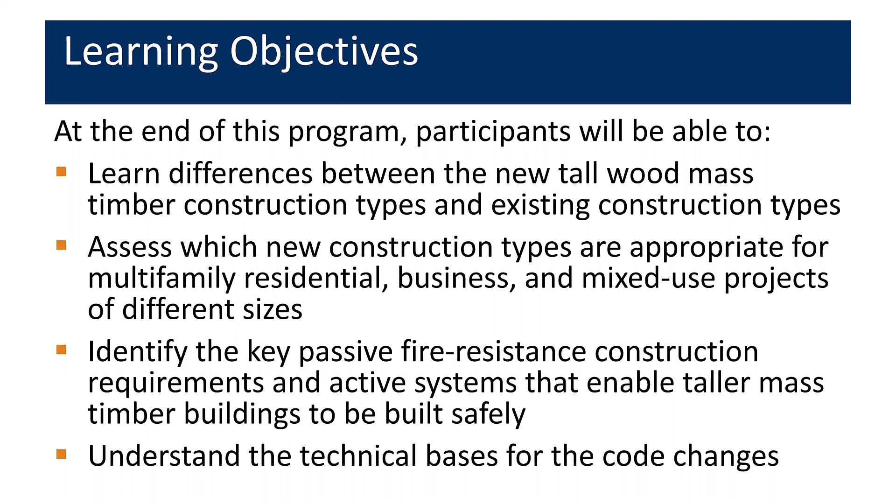Learning objectives: First, at the end of this program, you'll be able to understand the different types of mass timber construction in the 2021 edition of the IBC. You'll be able to assess the different construction types that are appropriate for various uses and heights of buildings. You'll be able to identify the key passive fire resistance requirements and the active systems that are needed to enable the use of taller and larger mass timber buildings. And you'll be able to understand the technical bases for the code changes themselves.

An outline of today's presentation: We'll have an introduction. We'll talk about some of the major issues affecting tall mass timber buildings. I'll bring you through the activities of the ICC Ad Hoc Committee on Tall Wood Buildings. Tim will talk about the major changes and some of the other changes. We have a case study, and then at the end we'll have a summary, and then of course we'll take your questions and answers.

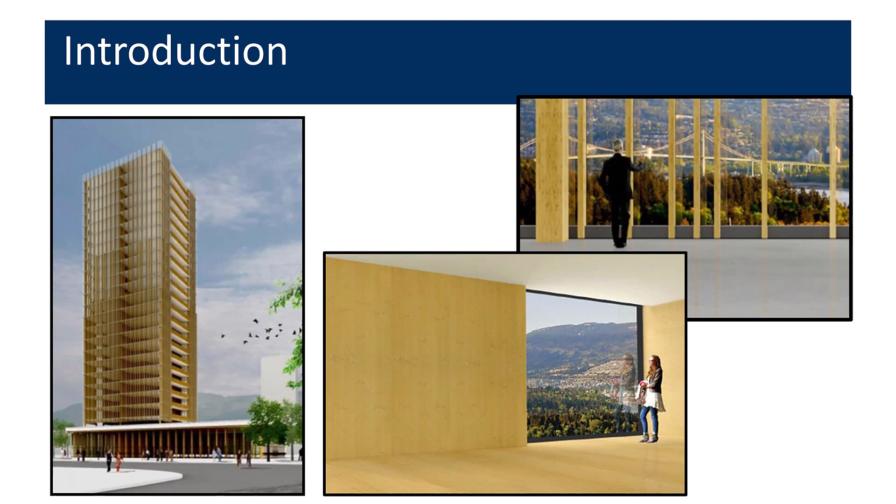So, you've undoubtedly seen much in the news about tall timber buildings recently in technical publications and architectural digests and various publications, and some of them have some very catchy headlines like this. But to folks in the fire safety business, this new technology presents some pretty significant challenges for fire safety.

This is a building that, when it was under construction in Minneapolis, what's now a 7-story, 220,000 square foot building, known in Minneapolis as T3, which stands for Timber, Technology, and Transit. It was considered the first modern tall wood building in the United States. It is, however, within the limitations of the International Building Code at the time it was built. It was not considered very tall at that time.

You'll notice in this photograph that not all of the structural elements are made of wood. You'll see that there's an elevator and stairway core, as well as the parking level and the foundation of the structure made out of concrete type 1 construction. So some people refer to this as a hybrid building, a combination of non-combustible type 1 in this case, and the type 4 mass timber.

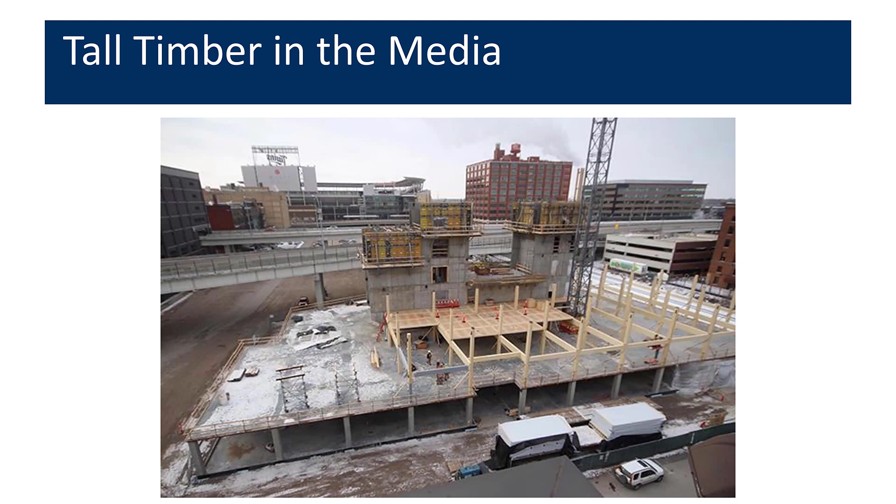This is a rendering of the interior of T3. And according to the information that I have, this building did not require any special local approval. It has an efficient structural system, and it's about 1/5 the weight of a similarly sized concrete building. So that has an effect on the foundations.

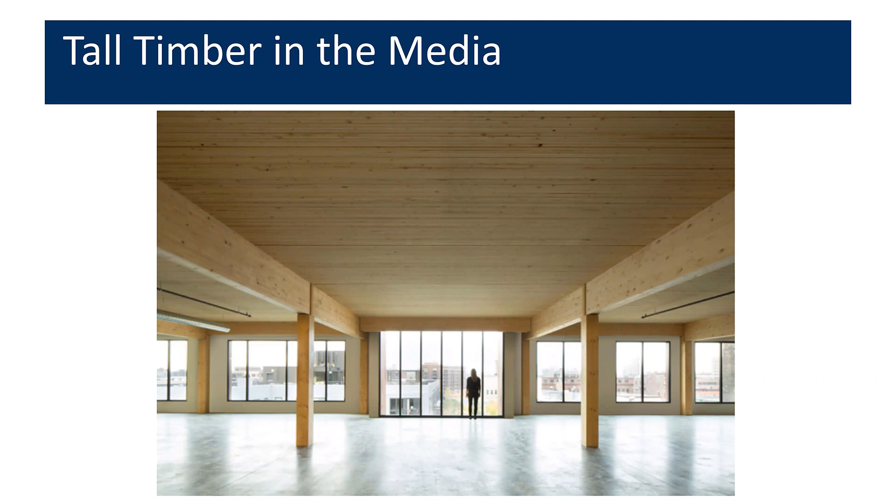So in addition to being made from sustainable lumber, which in this case looks very warm and inviting, it's also less energy intensive to extract these materials. And this building is estimated to sequester about 3,200 tons of carbon.

This next photograph is that of a mass timber building recently completed in Vancouver, at the University of British Columbia. It's one of the tallest mass timber buildings in the world. It's 18 stories and provides housing for more than 400 students, as well as including some amenity spaces. This is a hybrid structural system comprised of CLT floor slabs, that is cross-laminated timber, glue-lam columns, steel connectors, and concrete cores. This building stands about 53 meters tall.

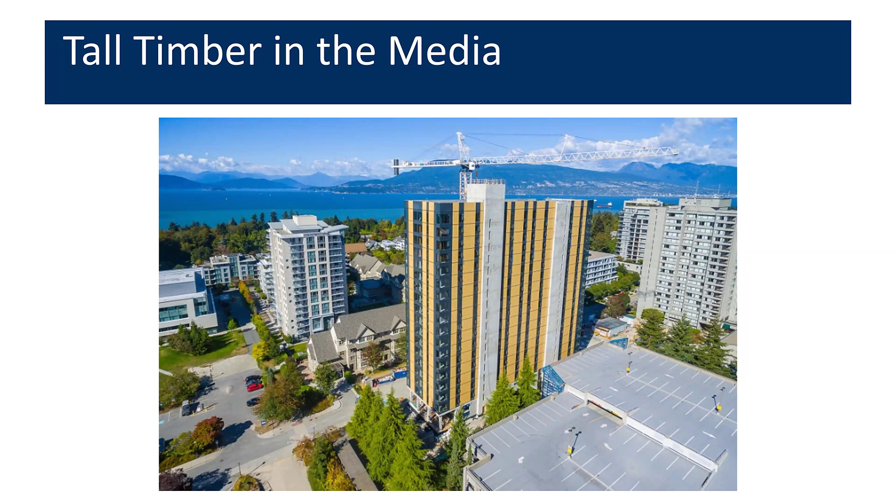I'll come back to that in a minute. In February of 2018, Sumitomo Forestry in Japan revealed plans for what's going to be the world's tallest building, in Tokyo, and that would also be Japan's tallest building. It's called W350 in honor of the firm's 350th anniversary that will occur in 2041. They think quite far in advance. This is a 70-story, 350-meter high building, very tall.

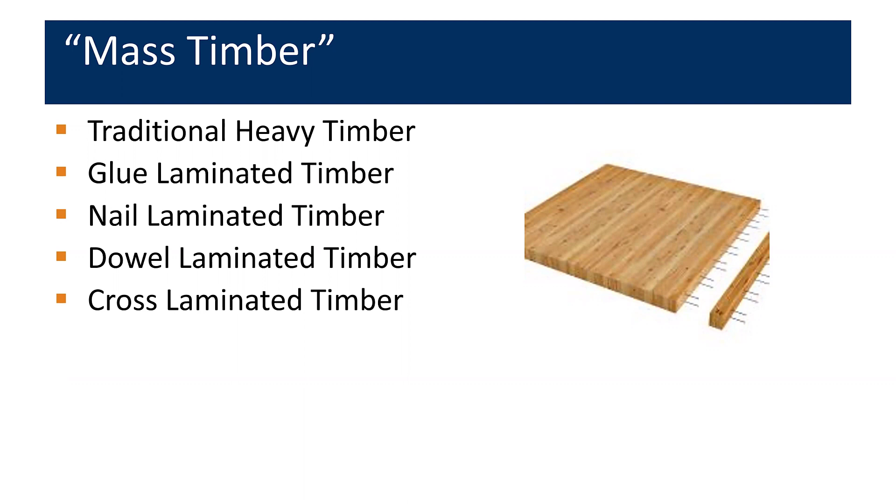So when we talk about mass timber construction today, what do we mean by that? In our ICC committee work, we use the term mass timber in a broad sense and included a new definition for it in the 2021 code. Mass timber includes what we've known as type 4 construction, traditional heavy timber buildings, but also includes glue laminated timber, nail laminated timber, dowel laminated timber, and cross laminated timber, often referred to as CLT.

The traditional heavy timber building is an example shown in this photograph on the left. It's a type of construction where the fire resistance of the structure is obtained by using minimum sizes of wood structural members and minimum thickness of wood floors and roofs, and traditionally does not include concealed spaces under floors and decks. Looking in the model building codes today, heavy timber construction has been given favorable treatment in its allowable area and number of stories, on par with type 2A construction.

This illustration on the right of this slide is one of the illustrations from one of the books I used in school, and it illustrates the components of a heavy timber building very nicely.

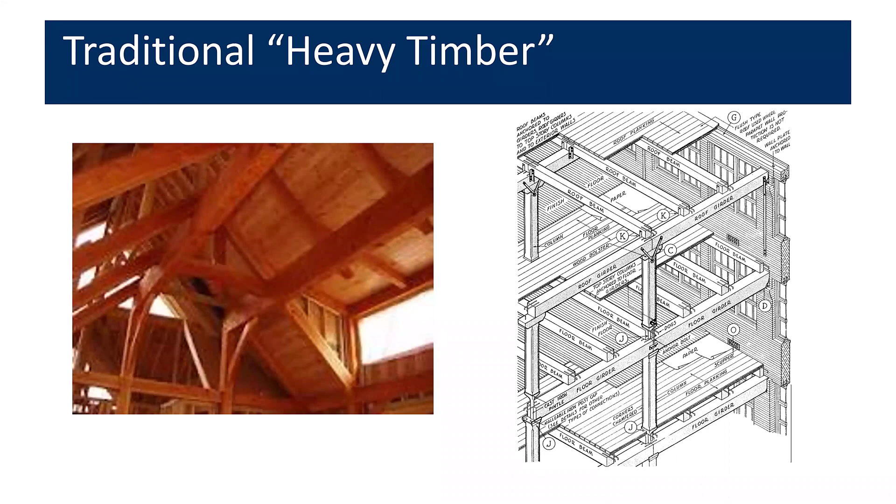Additional types of mass timber include glue laminated timber, a product that's been around for many years. It's composed of individual wood laminations bonded together with durable, moisture-resistant adhesives. The grain of all laminations runs parallel with the length of the member. It can be used horizontally as a beam or vertically as a column, and has very good strength and stiffness properties—pound for pound stronger than steel.

Nail laminated timber is created by fastening together individual lumber components stacked on edge and nailed together, as it sounds. It is used in floors, decks, and roofs, and also for elevator and stairway shaft walls.

Dowel laminated timber, not pictured here, is similar to NLT, but wood dowels are used in lieu of nails so that you have a totally wood product. In both NLT and DLT, sheathing can be added to one side to provide a structural diaphragm, allowing the panels to be used as wall elements.

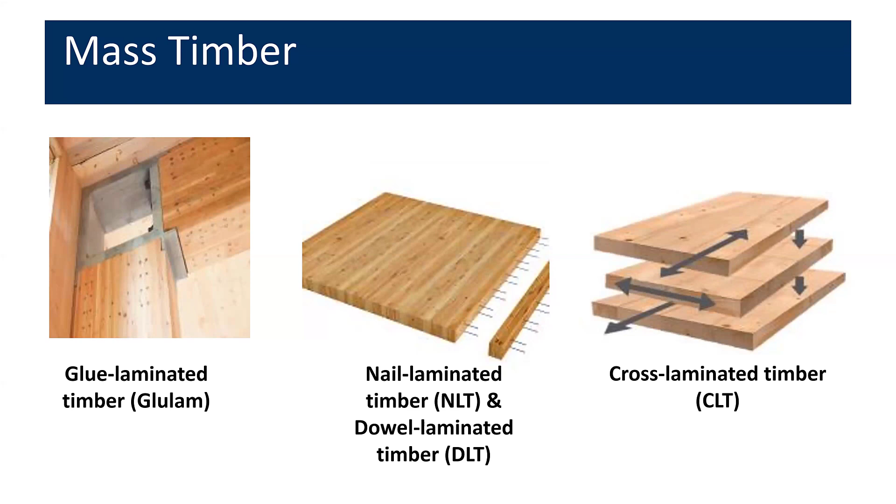CLT, cross-laminated timber, is a panel consisting of 3, 5, or 7 layers of dimensional lumber oriented at right angles to one another, as shown in this illustration, and glued together to form structural panels with exceptional strength, stability, and rigidity. CLT can be manufactured to any customized dimensions. Panel sizes vary by manufacturer, while length is usually limited by the ability to transport via truck or other type of transportation.

So why mass timber? There are a number of things driving the demand for mass timber buildings today. Wood products are made from renewable resources found abundantly in North America. In addition to the environmental benefits of building with wood, there are some cost reductions that help offset the additional cost of materials.

The T3 project in Minneapolis that I mentioned included 180,000 square feet of timber framing and was built in less than 10 weeks. The Brock Common building in Vancouver has no exposed wood for aesthetic reasons, but that construction was selected because of speed—the structural parts of that building were completed in 66 days.

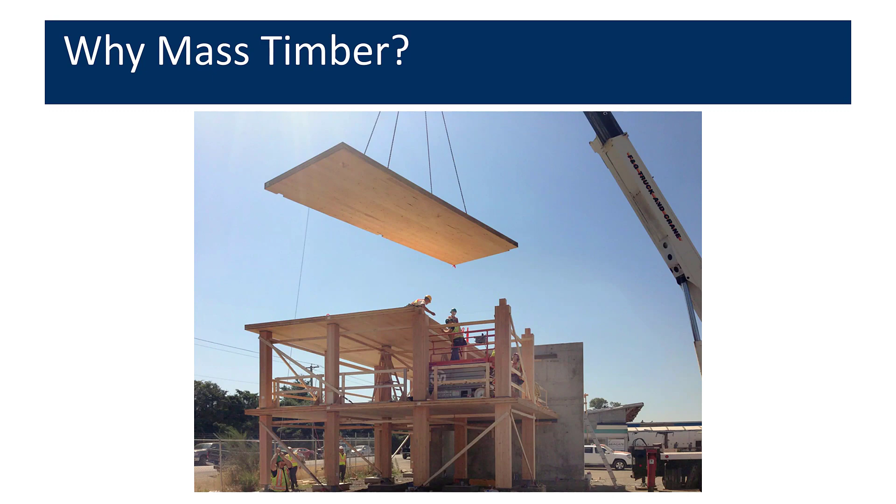Typically, the average time for construction for a mass timber building is about 9 days per floor. Product gets delivered to the site, there's very little storage of construction materials, and it's typically a very clean site.

But what are some of the issues that were of concern to the Ad Hoc Committee on Tall Wood Buildings in the ICC? From a fire safety point of view, the issues are pretty straightforward—there are some traditional principles that are of concern to the committee. Up to now, combustible construction was essentially phased out in high-rise buildings by the building codes. Generally, any type of building with a combustible structural system was limited to 7 stories.

For these reasons, limiting the fuel load reduces the risk to building occupants. As the building gets taller, they need longer evacuation times. Similarly, it facilitates firefighting in a more difficult building geometry as firefighters need to reach the taller buildings.

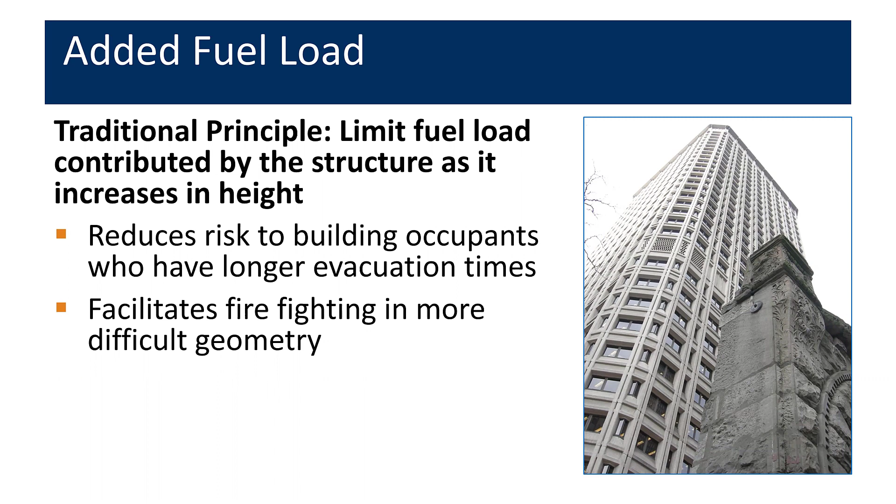So in this case, there's a demand to reduce the probability of structural failure for tall buildings.

And this should be obvious. High-rise building fire safety depends in part on what we call a defend-in-place strategy, where people are allowed and expected perhaps to remain in the building. But that means we have to reduce the risk of collapse to allow people to stay in place, to allow intervention by firefighters, and also to reduce the risk of property damage to the building in question, as well as adjacent buildings, what we call the exposed properties.

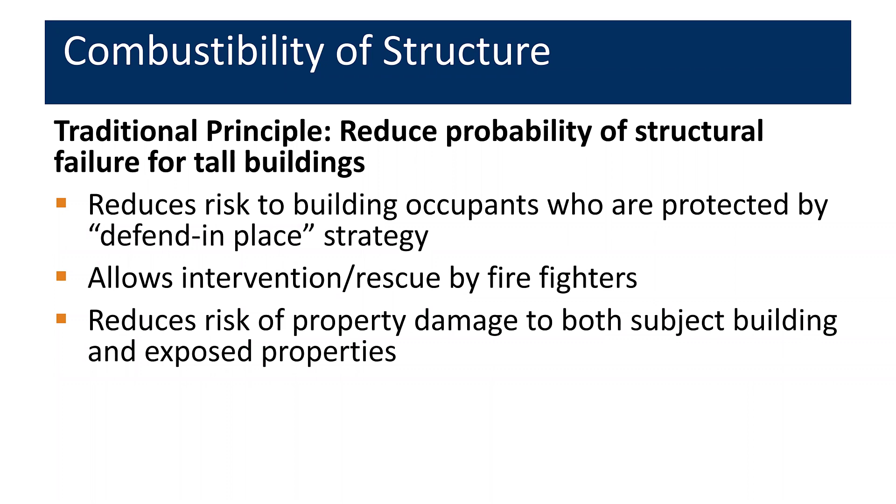We've seen some structural failures in low-rise, non-combustible buildings that are unprotected structures, like single-story warehouses. But they are normally not a defend-in-place concept, and they normally don't injure building occupants or firefighters when that happens. But allowing that type of failure in a tall building is not acceptable.

Another concern I call being well connected. There has been a lot of discussion and concern about the structural elements in a mass timber building. The connections shown here are classic cast iron caps on columns where the columns and beams tie in.

These exposed cast iron elements do not have substantial fire resistance and would not be suitable for use in a multi-hour fire exposure. They have historically not been much of an issue, but they're concerned as the buildings get taller and where we have a defend-in-place strategy, and the building elements are expected to survive a complete burnout of fuel and continue to support the structural loads.

That is normally considered without the benefit of automatic sprinkler protection. So there are systems that protect these connections in these taller mass timber buildings, either by embedding the connection within the wood or through an exterior barrier or coating or covering. And I envision that there will soon be laboratory listings of these connections that will make it easier for the design community as well as the enforcement community to select approved connection methods.

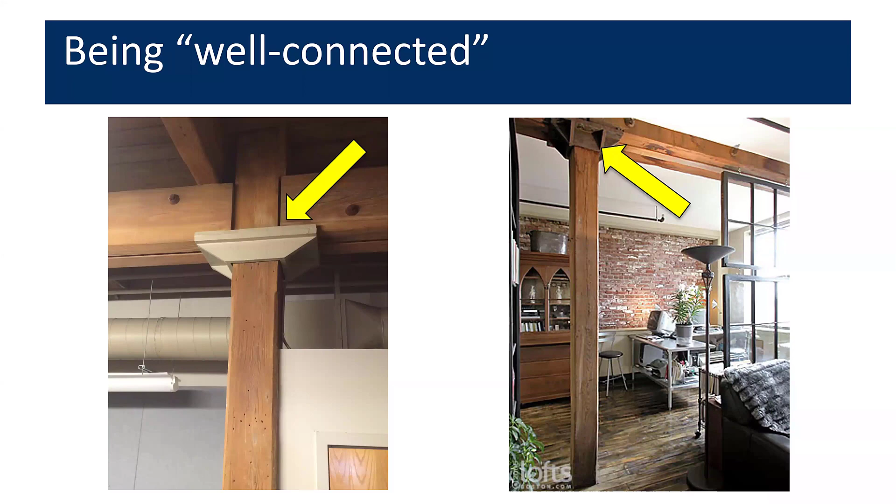Another issue that we've seen as a result of some early testing: the 2015 edition of the IBC recognizes CLT products when they're manufactured according to an industry standard, a product standard called PRG 320. There are various adhesives that are used to manufacture CLT. These adhesives have been used in glulam for many years, like I mentioned earlier. But some of the early fire tests that I'll talk about shortly revealed some concerns about the performance under long fire exposures of these adhesives.

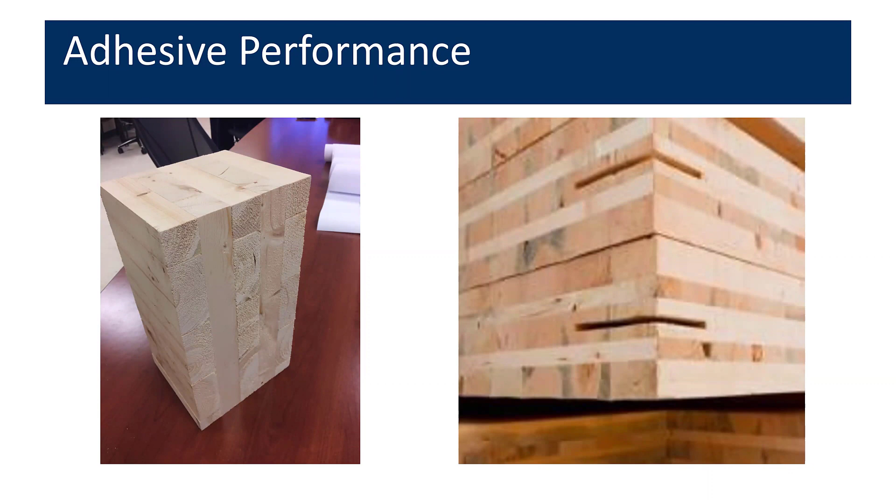So our committee embarked upon a follow-up series of fire tests, and as a result of that, a new version of the product standard PRG 320 was developed, and I'll talk about that a little bit later. So those are some of the major issues that our committee faced before we even got started.

So I want to talk a little bit about the work of the Ad Hoc Committee and how we developed what is now in what will be the 2021 edition of the IBC. In late 2015, the ICC Board of Directors appointed an ad hoc committee to explore the science of tall wood buildings, to review the literature, to look at fire tests, and ultimately develop language for incorporation into the IBC. Our first meeting was held in the spring of 2016.

Our committee consisted of 17 voting members, and of those 17, 2 were engineers. I was one of those engineers. 4 building officials, 3 fire officials, 2 architects, 5 industry representatives, and 1 testing organization, Underwriters Laboratories. There were also several dozen other interested parties who participated in the effort with their comments, their input, and in their overall help with the committee over about a 2.5-year period.

At our first meeting, we established some performance objectives concerning what we expect from tall wood buildings. First, that there would be no collapse under reasonable scenarios of a complete burnout of the fuel without automatic sprinkler protection or manual firefighting being considered. There would be no unusually high radiation exposure from the tall wood building to any adjoining properties that would present a risk of ignition of adjoining properties under reasonably severe fire scenarios. Third, there would be the reverse of that, no unusual response by the tall wood building to a radiation exposure from a fire from an adjoining property that might ignite the tall wood building.

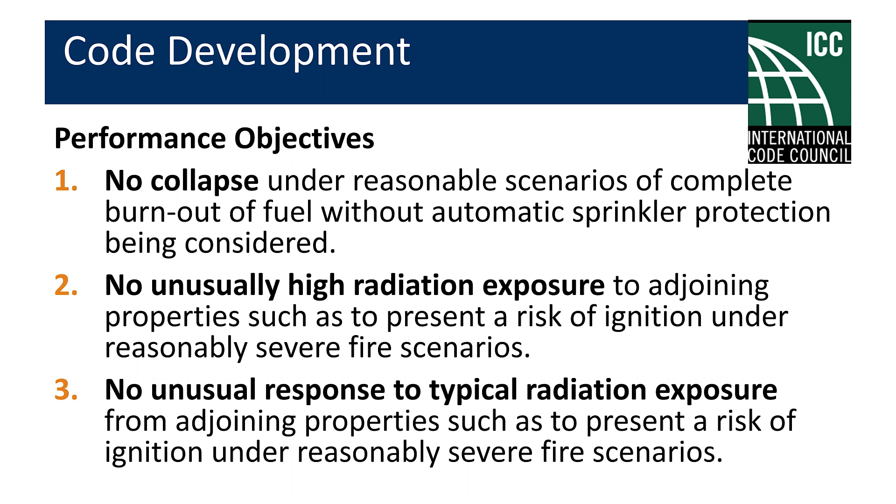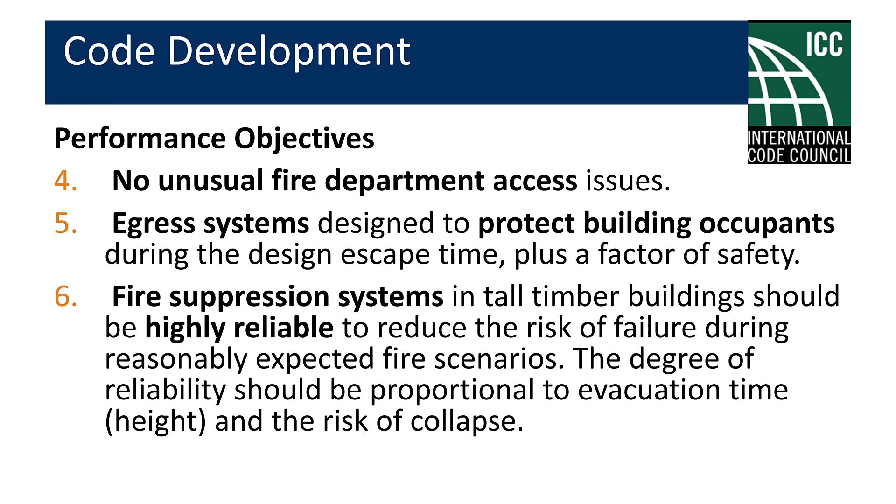Fourth, there would be no unusual fire department access issues. Fifth, that we would have an egress system that would protect building occupants during an escape time, including a factor of safety. We are not using a defend-in-place strategy here. And finally, number 6, that our fire suppression system should be highly reliable to reduce the risk of failure during reasonably expected fire scenarios, and that the degree of that reliability should be proportional to the evacuation time and to prevent the risk of structural collapse.

So we had quite a bit of work to do. Our committee was divided into several subcommittees we referred to as working groups. This is a list of the working groups we had. There were dozens of meetings and conference calls over the period of our work, and involved about 100 people over the course of this 2.5-year period.

All meetings were open to the public. All activities were documented on the ICC website, and that website is still available for review to see what we looked at, as well as some of the working drafts of our work during that 2.5-year period.

One of the things we talked about in our committee was that all of the code change proposals we developed would have their foundation based on actual fire tests. One of our work groups, the Fire Performance and Fire Test Work Group, was responsible to develop the fire test criteria.

Going beyond tests that we received from the NFPA a couple of years earlier that left some questions in our minds, our committee directed a second full-scale fire test program, sponsored in part by the U.S. Department of Agriculture and the American Wood Council, and conducted at the Alcohol, Tobacco, and Firearms Fire Laboratory in Beltsville, Maryland.

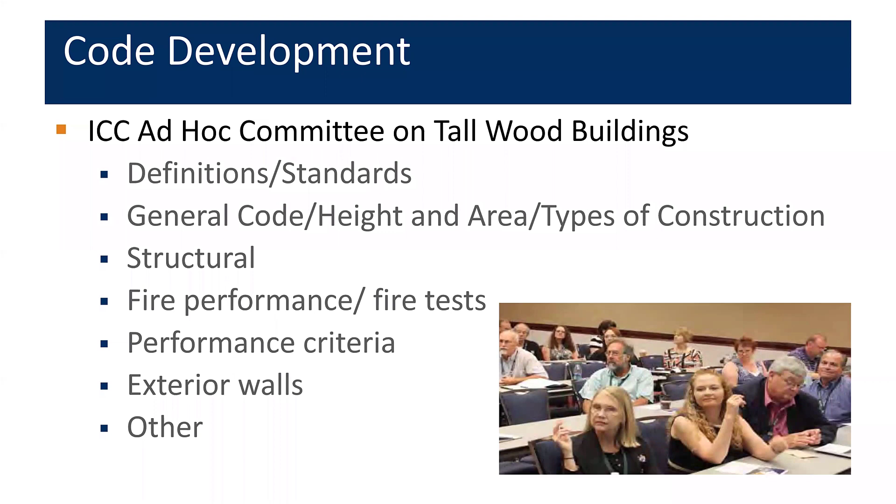Our objective was to submit technically based code changes for the IBC code change cycle, which was coming up in January of 2018. That's the deadline for the 2021 edition.

So as I mentioned, our committee directed that the industry conduct a second series of fire tests with a bit more relevance to the issues of concern. The work group was operating parallel to other work groups, reviewing literature, taking testimony, and reviewing the current edition of the IBC to see what was needed to be modified as we proceeded with our technical analysis.

Back to the fire test. This is a sketch, a floor plan of the simulated residential unit at the Alcohol, Tobacco, and Firearms Lab. It was a two-story space, an apartment simulating a two-room unit with living room, bedroom, bathroom, kitchen, plus a corridor and a stairway. We did that to determine what the environment would be like for responding firefighters.

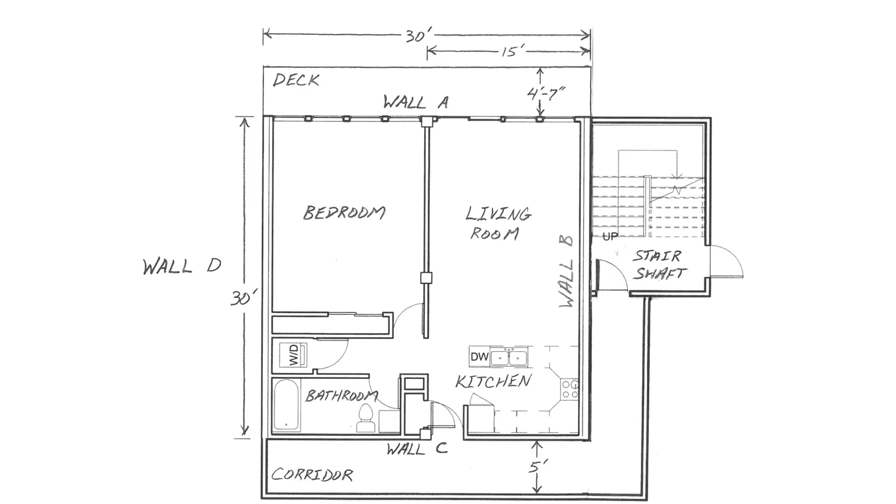This is a summary of the 5 tests we did and some of the major parameters. Test 1 was a baseline test with all walls and ceilings covered with 2 layers of gypsum wallboard. Test 2 was the same, but had 1 wall of exposed wood. Test 3 was the same as test 1, but had 30% of the ceiling area exposed.

Test 4 employed automatic sprinklers operating in a conventional manner with fully exposed walls and ceilings. Test 5 was similar to test 4, but included a delayed operation to simulate what would happen if the sprinkler system was out of service and the fire department, upon arrival, used the fire department connection to provide water to the fire.

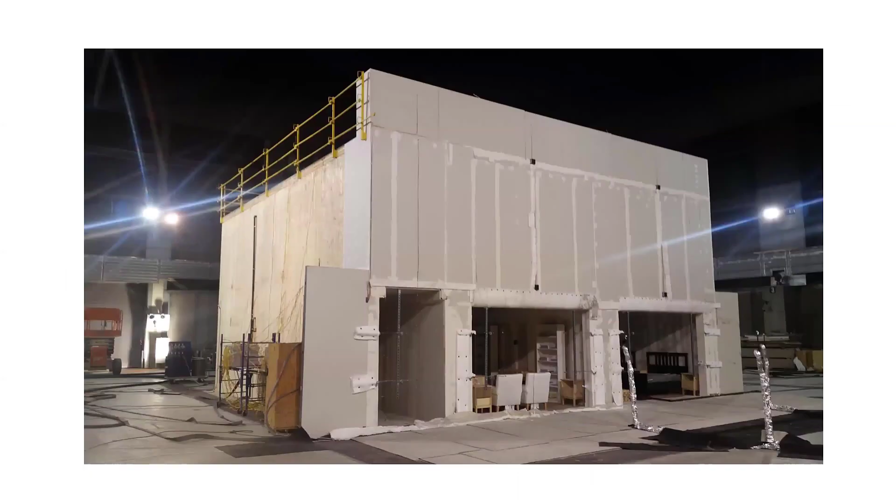This photograph is of the simulated dwelling unit in the Alcohol, Tobacco and Firearms Fire Test Facility. The openings on the second level are blocked off because we did not want to damage the spaces in the second level during the fire test. We ran three of these tests on the first floor.

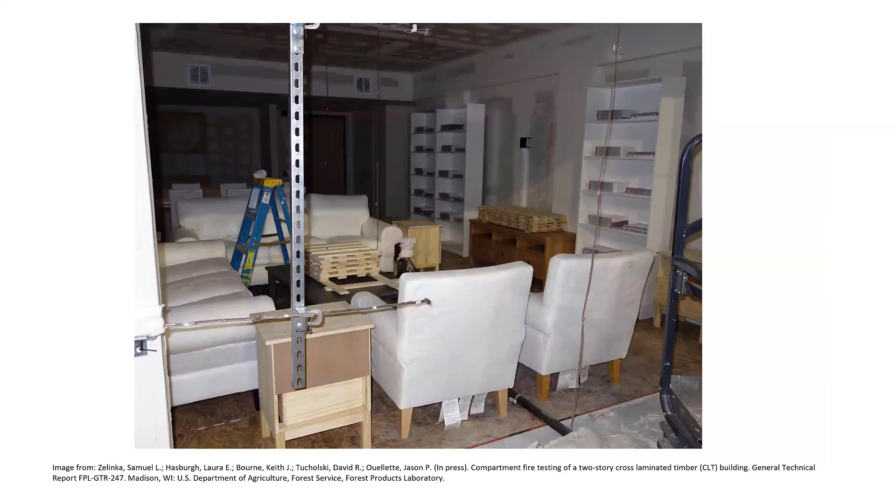This is a photograph of the simulated dwelling unit loaded with typical combustible furniture in each test. This fire load was determined based on a study of typical residential fire loads. You'll see this looks pretty crowded, with wood cribs, as we call them, in the space to get to the fire load that we wanted to achieve as a target.

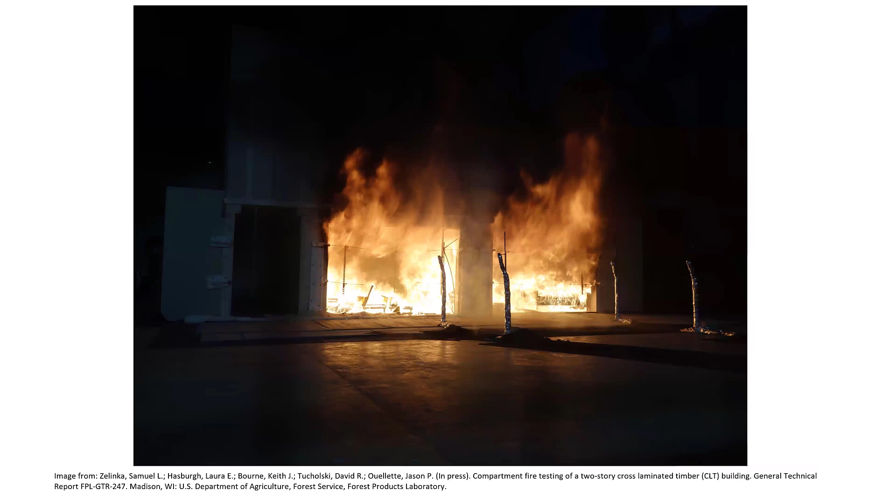This is what one of the fire tests looked like at its peak. Again, the first 3 tests we did had no intervention—no automatic sprinklers, no firefighting. These were allowed to burn themselves out while we collected all kinds of data on temperature, carbon monoxide, heat release rates, and other parameters.

If you're interested, you can see videos of these tests on the ICC website in a high-speed format, so you don't have to spend 2 hours watching each test. I think it provides some very nice insight into what we were achieving and the data obtained. The reports themselves are also available on the ICC website.

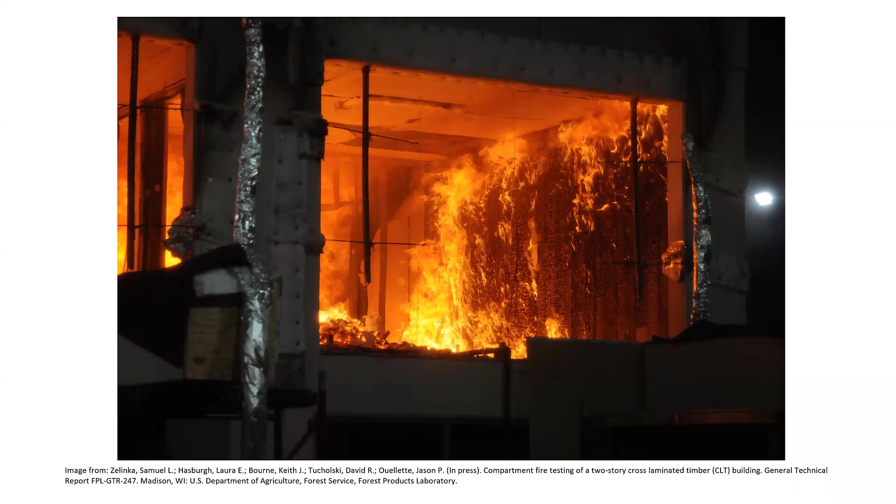Going back to the 5 tests, I want to emphasize this recap of the tests involving automatic sprinklers. Test 4, sprinklers operating in a conventional manner—the results were as expected. There was no remarkable heat exposure or damage to the unit.

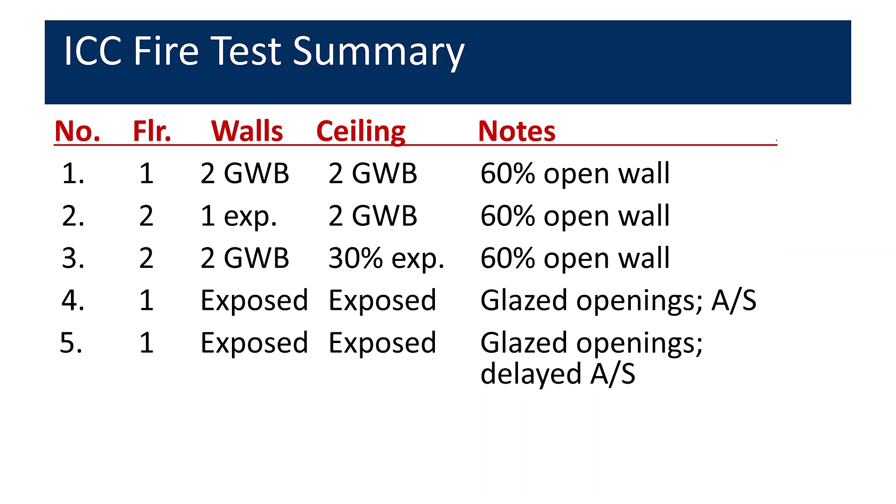In test 5, after a 22.5-minute delay simulating an inoperable sprinkler system, the fire was promptly extinguished as water operated from the open sprinklers. So overall, the sprinklers performed well in both tests.

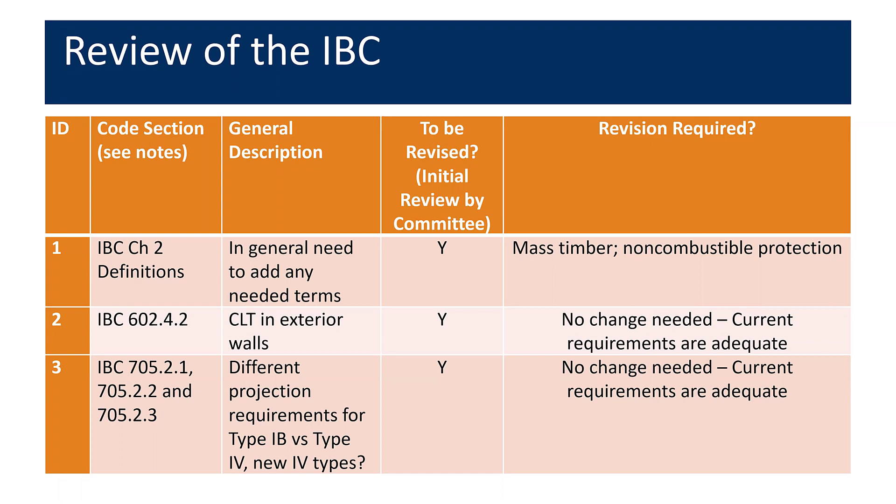So while the fire tests were underway by one of our subcommittees, the technical committee also went through a thorough review of the entire IBC and identified about 100 potential sections of the code that could be affected by the construction of taller mass timber buildings. This is an example of a matrix we used.

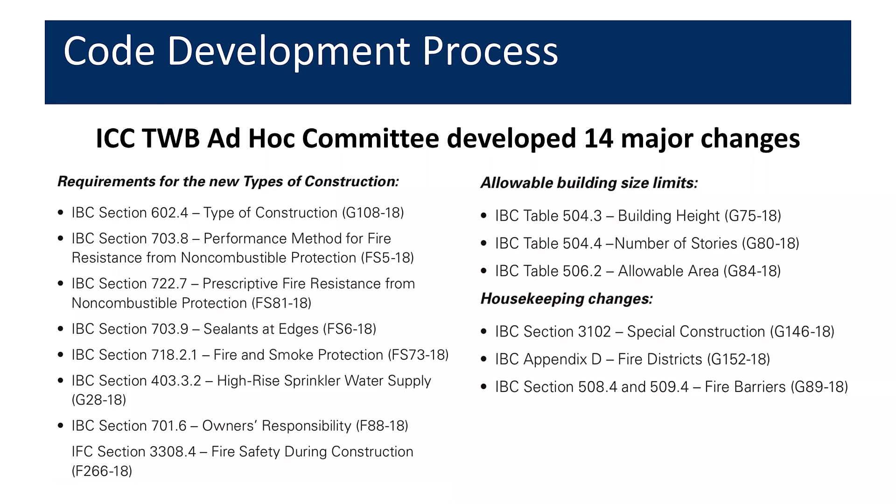We went through those 100 sections of the code, and this work went on for many months. In the end, we developed 14 major code changes to allow taller and larger mass timber buildings than what were currently allowed in the 2018 edition. This is a summary of those major changes. I won't get into all these, but we'll highlight the major changes shortly.

In 2019, the Group B changes, which are related to some of the structural provisions, went through the same process. And in fact, just a week ago at the ICC, the Group B changes were voted on, and we're waiting for the full vote of the membership, which is expected to pass as well. So now we'll get into some of the major changes, and I'll pass it on to my colleague, Tim Costello.

Thank you, Carl. So what's changed in the 2021 IBC? To start, we'll discuss what's in the 2018 International Building Code. The 2018 International Building Code includes 5 main construction types. Type 1 and 2 are non-combustible. Types 3 and 5 have lightweight combustible framing. And type 4 is what is known as traditional heavy timber construction that Carl mentioned previously.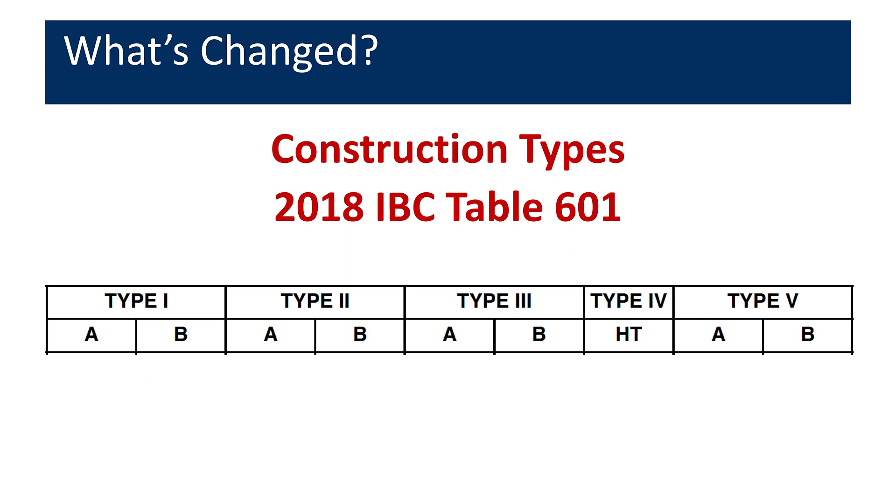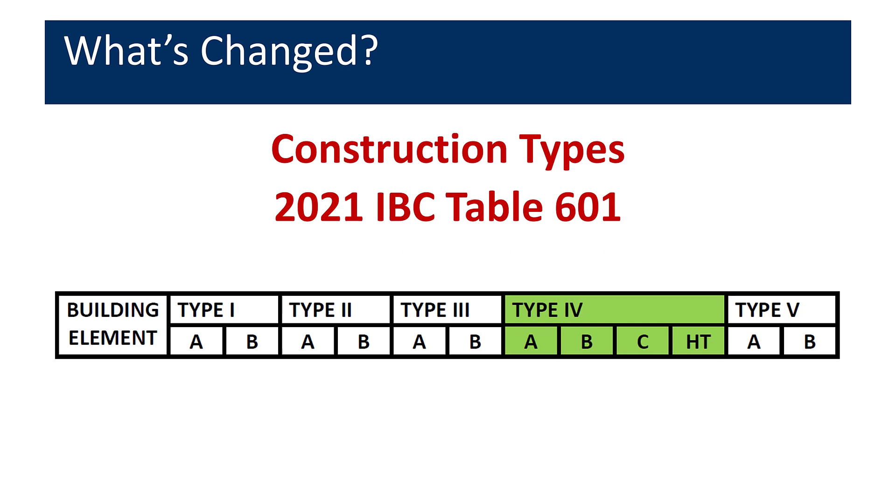The subtypes A and B also provide for different fire resistance ratings for the key building elements within the major construction types. The changes in the 2021 edition introduced 3 new subtypes of type 4 construction: type 4A, 4B, and 4C. What was known in the 2018 edition as type 4 is now called type 4 HT for heavy timber. These new subtypes were the result of market demand, with some designers and owners wanting the wood aesthetic and others wanting to achieve carbon sequestration.

The 3 new subtypes of type 4 construction are significant in that they are based on fire resistance ratings rather than the minimum dimensional lumber sizes previously applicable to type 4 heavy timber construction. A fundamental principle adopted by the Ad Hoc Committee on Tall Wood Buildings was to leave the 2018 IBC requirements for type 4 heavy timber alone. Therefore, the values for type 4 heavy timber in Table 601 remain unchanged. Highlighted in red are the required ratings for the structural frame, walls, and roof.

The minimum ratings for the primary structural frame and bearing walls for type 4A construction are 3 hours, and types 4B and C are 2 hours. Floor construction is 2 hours, and roof construction is either 1 hour or 1.5 hours.

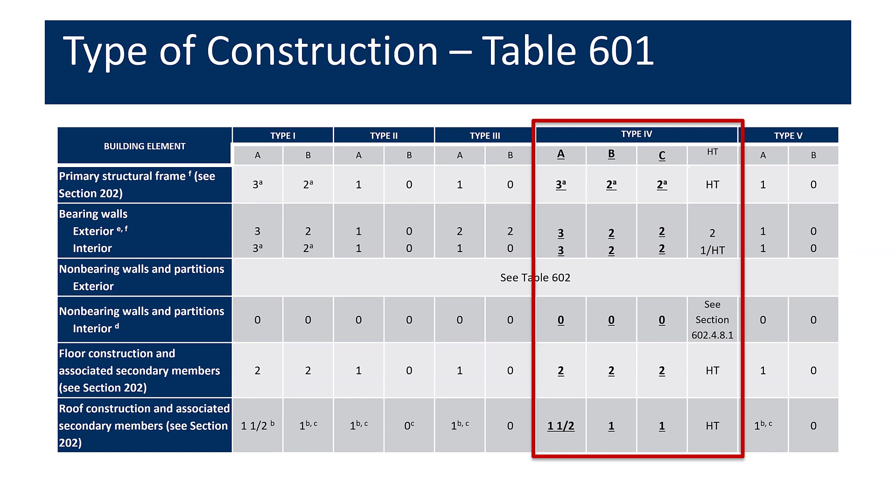The primary difference between each new subtype relates to the amount of exposed wood surfaces that will be permitted. Exposed mass timber surfaces will not be permitted in Type 4A construction, while Type 4B will allow for a portion of the mass timber surfaces to be exposed. Type 4C will allow fully exposed wood surfaces similar to Type 4 heavy timber construction today. Accordingly, Type 4A buildings will be allowed to be taller and larger than Type 4B, and Type 4B larger and taller than Type 4C.

The fire resistance rating of mass timber structural elements is required to be determined based on the fire resistance of the mass timber element itself, which can be calculated, plus the rating from non-combustible protection that is applied to it. Chapter 16 of the American Wood Council's National Design Specification includes information on how to calculate the fire resistance of CLT, NLT, glulam, and solid sawn lumber, and is a great resource for these designs.

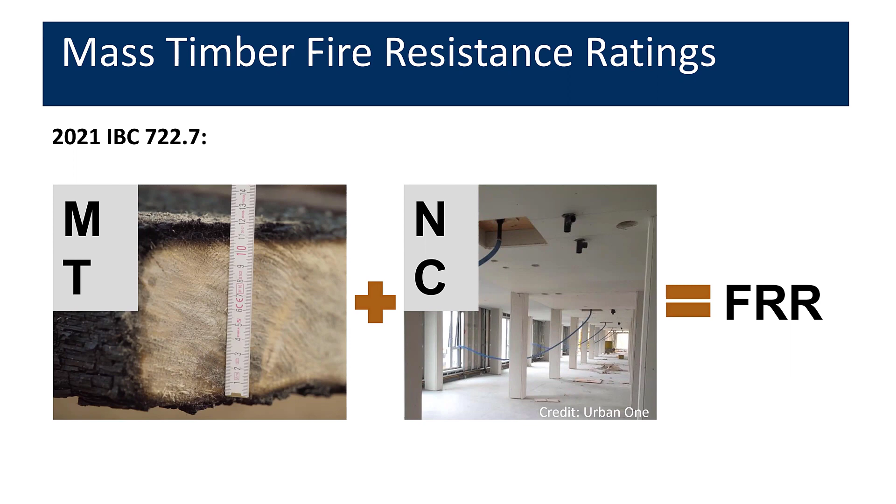In addition to meeting the required fire resistance ratings identified in Table 601, all mass timber elements must also meet certain minimum sizes. These sizes are those historically used for heavy timber in prior editions of the IBC, and they can be found in Section 2304.11.

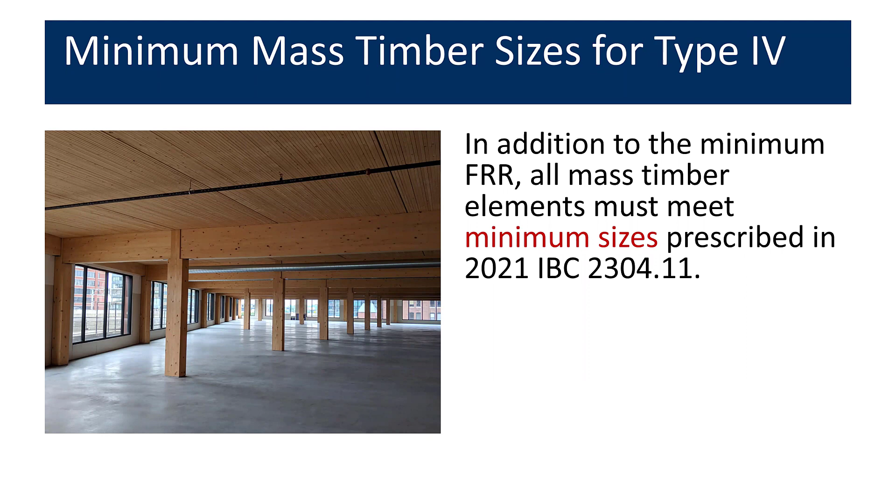Being conservative, for mass timber elements, two-thirds of the required fire resistance rating must be provided by passive protection, offered by non-combustible coverings such as gypsum board. For example, where a 3-hour rating is required for Type 4A construction, at least 120 minutes of that rating must come from passive protection.

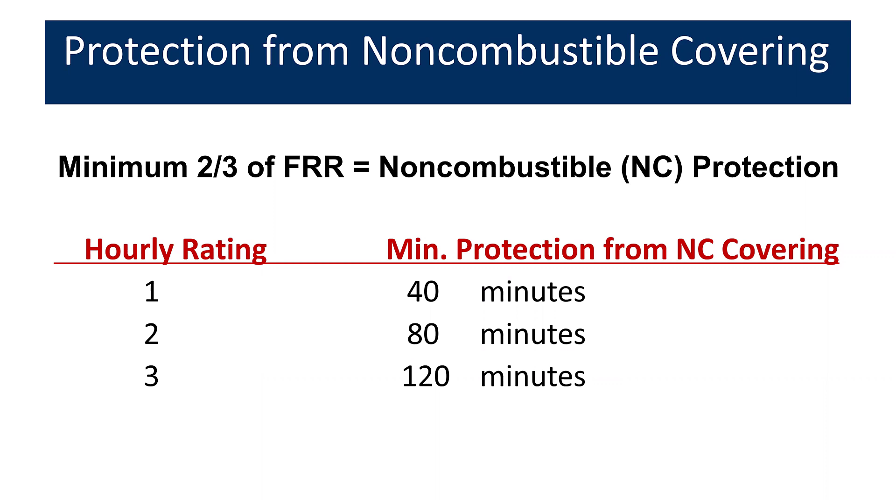To aid in determining the amount of protection afforded by typical non-combustible materials, Section 722.7 was added and includes a prescriptive table similar to this one identifying the amount of protection provided. This section also details the method of attachment, finishing, and edge treatment where bordering on exposed mass timber areas. As an example, 1 layer of Type X gypsum wallboard will afford either 30 or 40 minutes of protection depending on its thickness. 2 layers would provide 80 minutes.

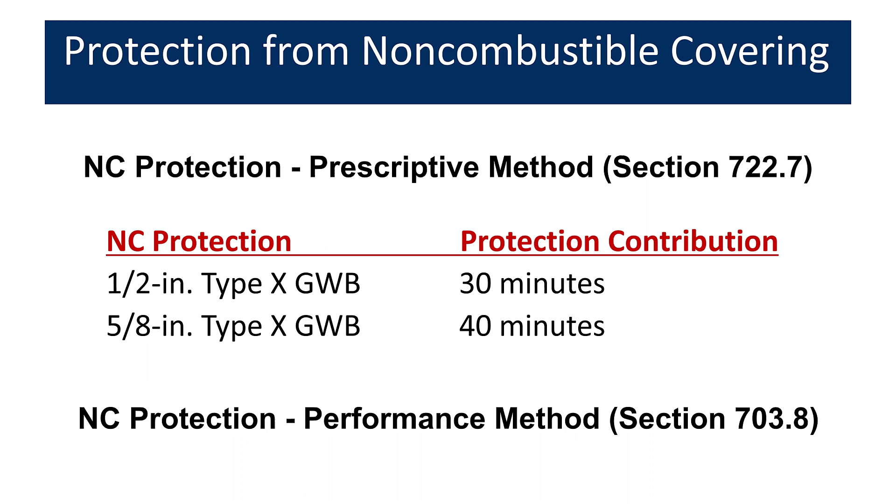In addition to the prescriptive fire resistance method described in Section 722.7, Section 703.8 was added to provide for a performance-based approach. This will allow designers to provide non-combustible protection using other materials or assemblies based on the ASTM E119 fire test procedure to determine the time contribution of the non-combustible protection to the fire resistance rating of the overall mass timber element.

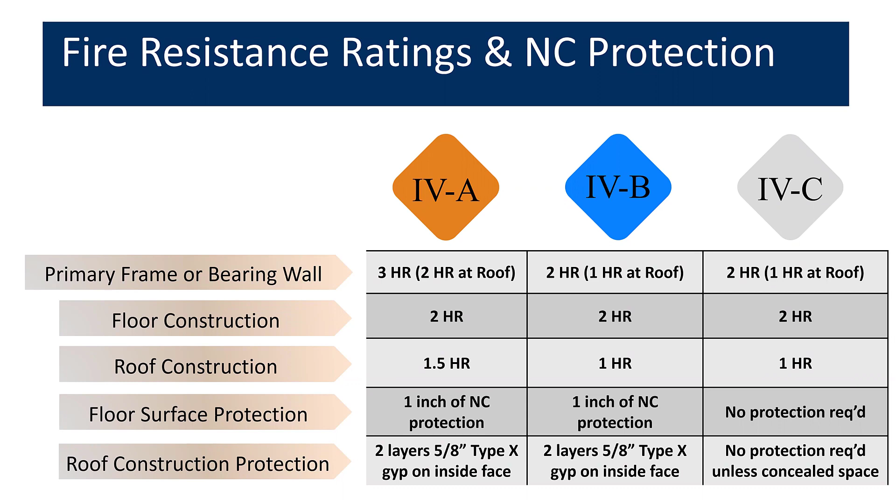Here are some additional details on other elements of the building requiring non-combustible protection. Please note that no exposed combustibles are permitted on the exterior walls in any of these 3 types of construction.

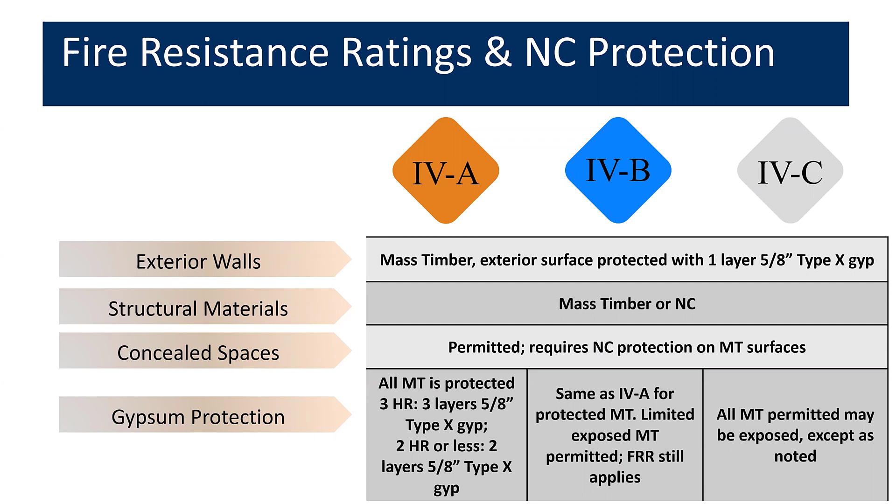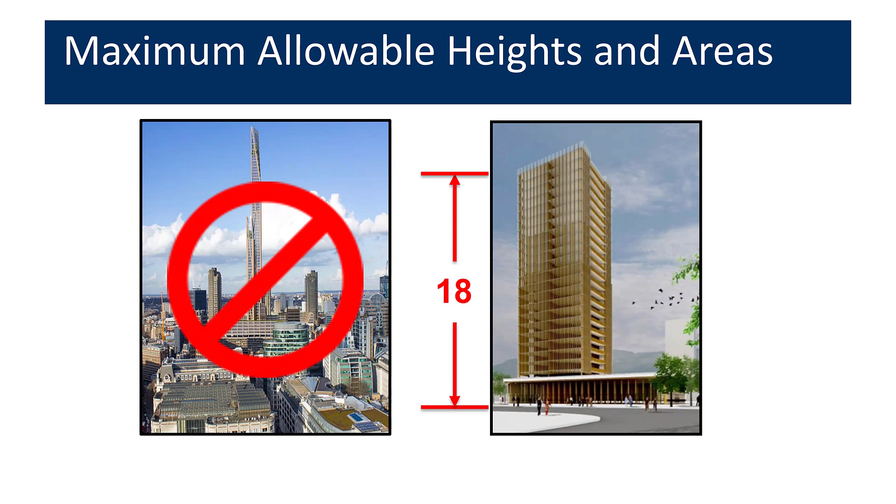A significant concern during the code development process was building height. Unlimited heights are not permitted with mass timber construction. The current maximum height is 18 stories for residential buildings and 18 stories for business occupancy buildings.

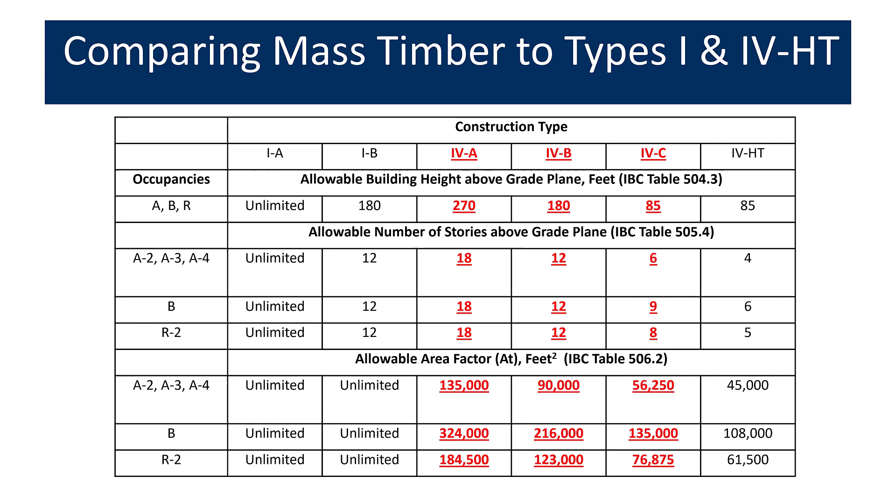The height and area tables in the IBC are not scientific. Professional judgment involving a multiplier is used to develop the height and area requirements for Types 4A, 4B, and 4C construction, with the heights or areas of some occupancies then reduced based on relative risks. The rationale employed is discussed in more detail on the following slides.

For Type 4A construction, the height and story limits are 1.5 times that provided for Type 1B construction, which is commonly known as 2-hour protected fire-resistant construction. Note that the fire resistance ratings required for Type 4A construction are equivalent to that of Type 1A construction or 3-hour protected construction, making this a conservative multiplier.

Type 4A construction will allow for the tallest mass timber buildings at 18 stories and 270 feet in height. Similarly, using a ratio, the area limit for Type 4A construction was generally 3 times the area limit for Type 4 heavy timber. As mentioned, the resulting values were reduced for higher risk occupancy such as high hazard and institutional.

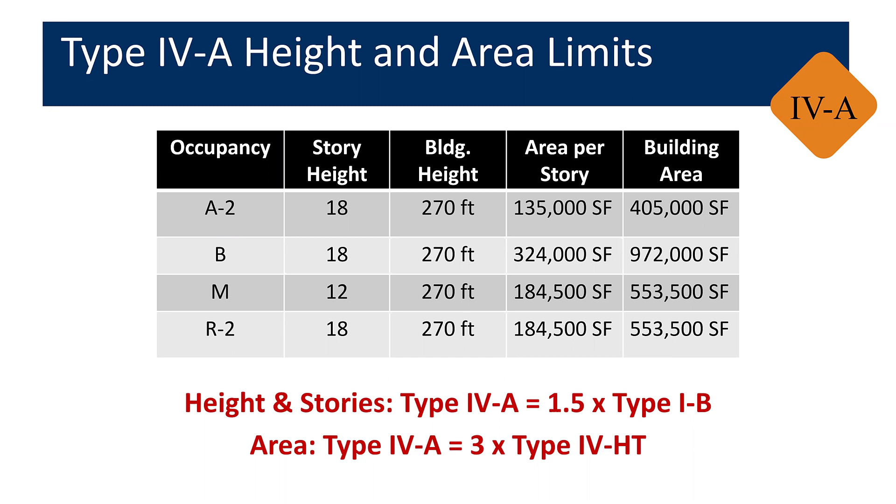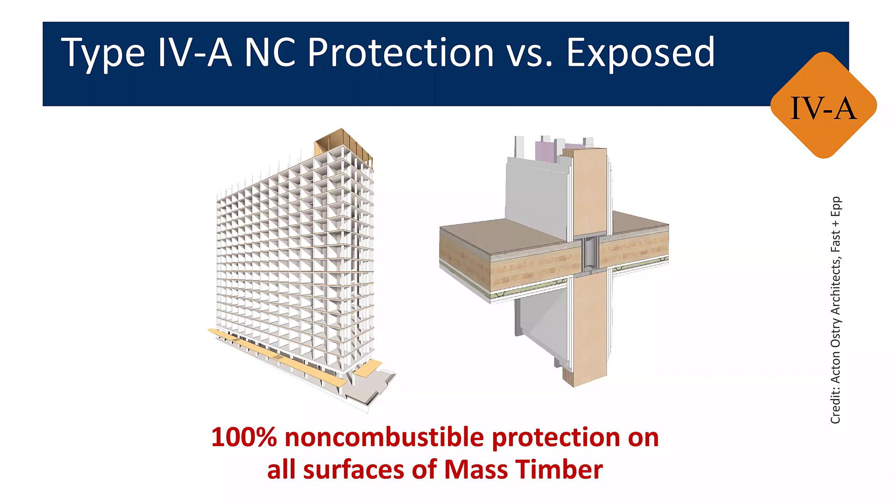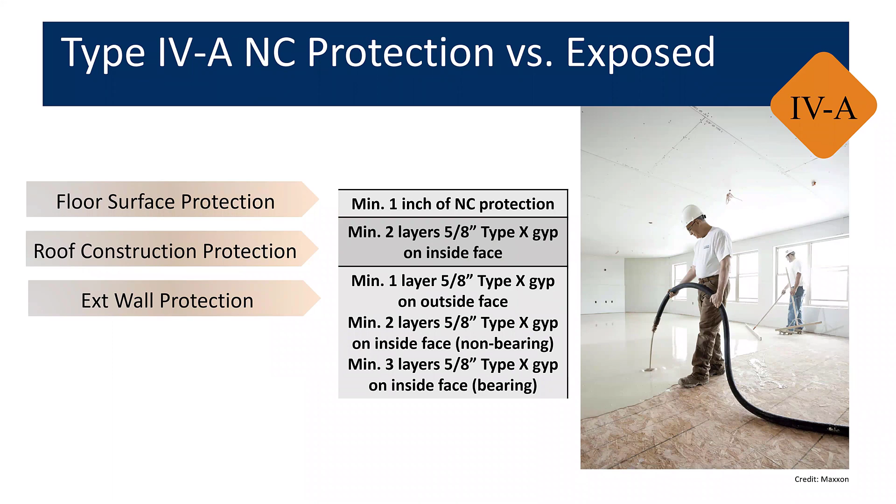As described earlier, Type 4A construction requires all of the mass timber surfaces of structural elements to be provided with passive protection. Other elements like floor surfaces require a minimum of 1 inch of non-combustible protection. Exterior walls require at least 2 layers of 5/8 inch gypsum wallboard on the inside surface and 1 layer on the exterior surface.

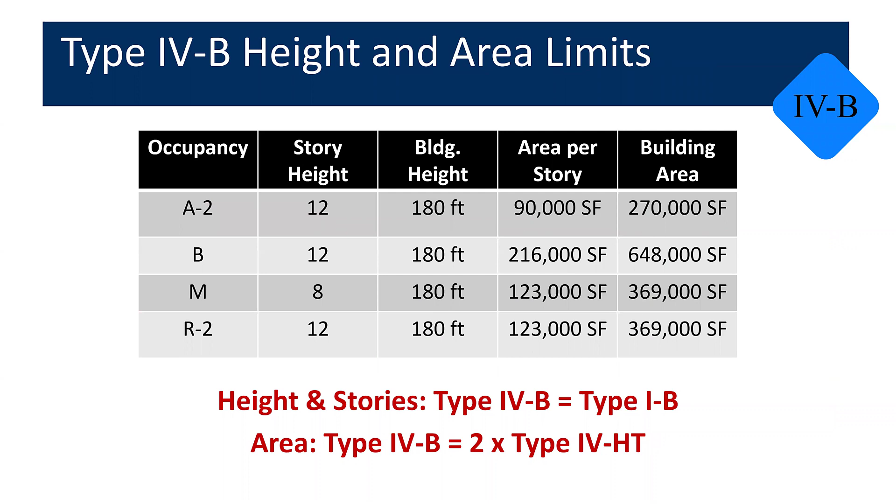The height and story limits for Type 4B construction are the same as those permitted for Type 1B construction. The area limit was generally 2 times the area limit for Type 4 heavy timber. Again, in a number of cases, the committee reduced the resulting values to be more conservative, like for high hazard and institutional occupancies.

In Type 4B construction, non-combustible protection is required on the surfaces of all mass timber structural elements with limited exceptions for exposed areas. These photos show how these limited exposed surfaces can be used to achieve aesthetic effect.

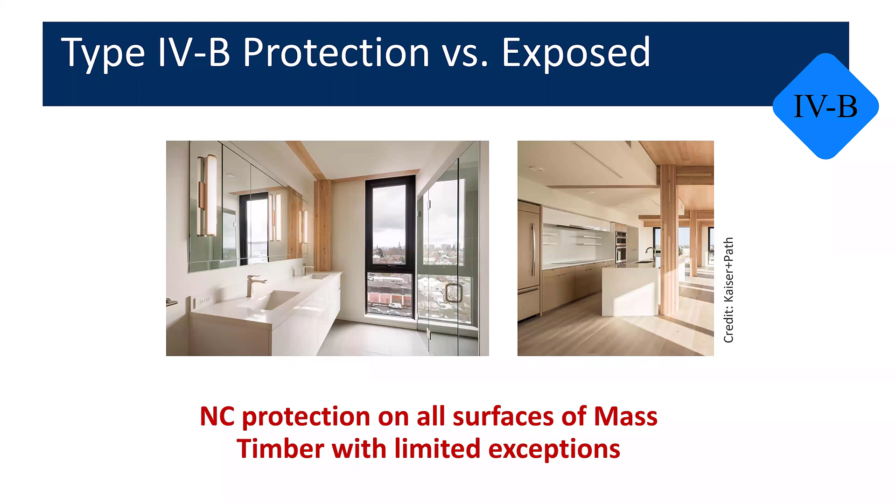The amount of exposed mass timber surfaces is given as follows. Any mass timber beams and columns that are not integral to the walls or ceilings may be exposed. As an example, the column in the foreground in the picture would be not integral to a wall, therefore it's allowed to be fully exposed.

Otherwise, mass timber ceilings and beams may be exposed up to 20% of the floor area of the dwelling unit or the fire area in which it is located. Or walls and columns may be exposed up to 40%. Or you can have a combination thereof.

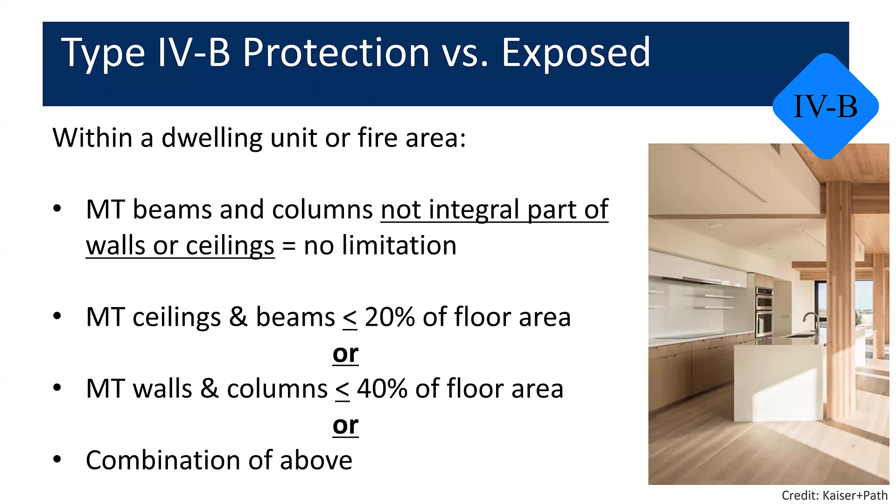The calculation for mixed unprotected surfaces, including both ceilings and walls, is shown by this equation. As an example, for a dwelling unit that has an area of 1,000 square feet, up to 200 square feet of ceilings and integral beams can be exposed, or 400 square feet of walls and integral columns can be exposed.

If a combination of exposed walls and ceilings is desired, then the exposed surface areas of each must be reduced per this equation. In this example, we are using 50% of the permitted amount of exposed surfaces for both ceilings and walls. If the actual amount of exposed ceilings is increased, the amount of exposed walls must be reduced accordingly.

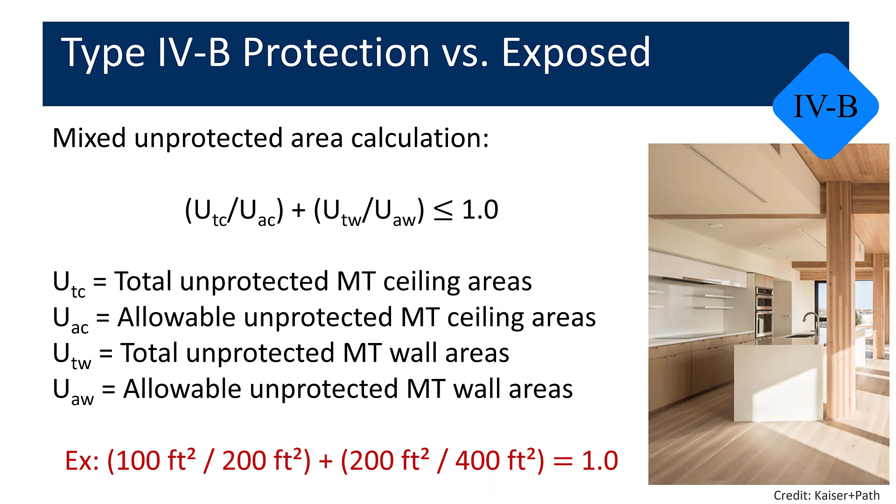There is also a limit on how close exposed mass timber surfaces may be to other adjacent exposed mass timber surfaces. A minimum distance of 15 feet is required, measured horizontally along the ceiling or the floor.

The combination of area and adjacency limits on exposed mass timber surfaces is conservative and does not take into account the benefits of automatic sprinklers. However, this conservatism was the consensus of the committee and what was approved up to now. More fire tests might benefit this issue in the future.

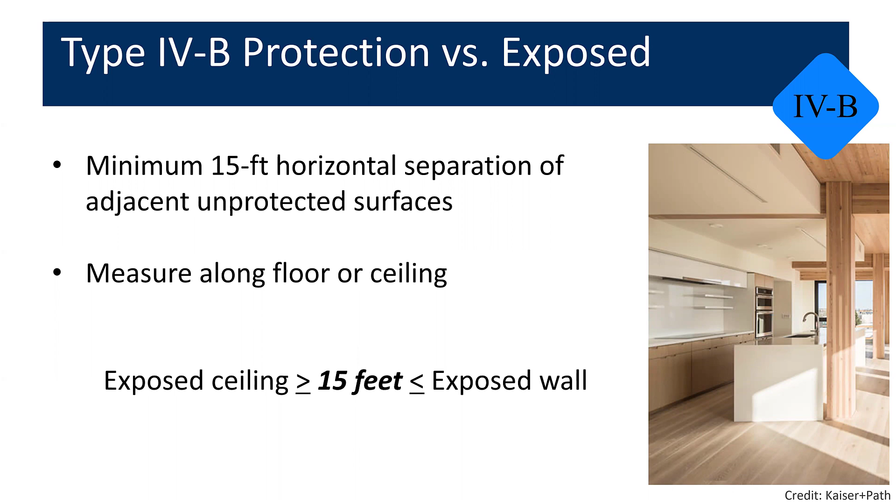Similar to Type 4A construction, non-combustible protection is required for mass timber floors, roofs, and exterior walls in Type 4B construction. The floor surfaces require a minimum of 1 inch of non-combustible protection, and the roof requires 1 layer of 5/8 inch Type X gypsum wallboard on the inside face. The exterior walls generally require at least 2 layers of 5/8 inch Type X gypsum on the inside surface and 1 layer on the outside surface.

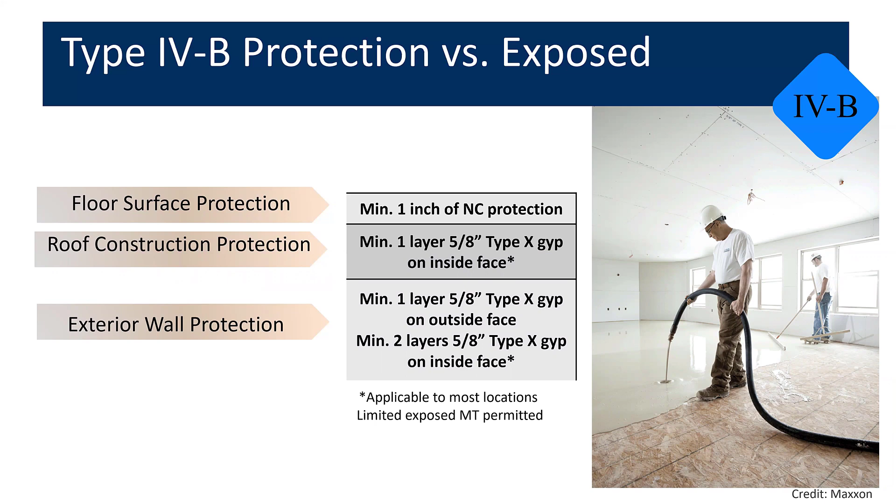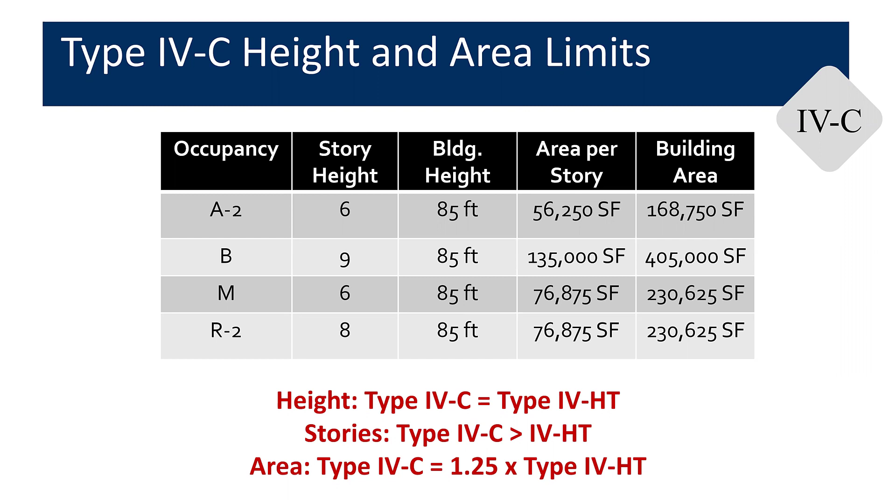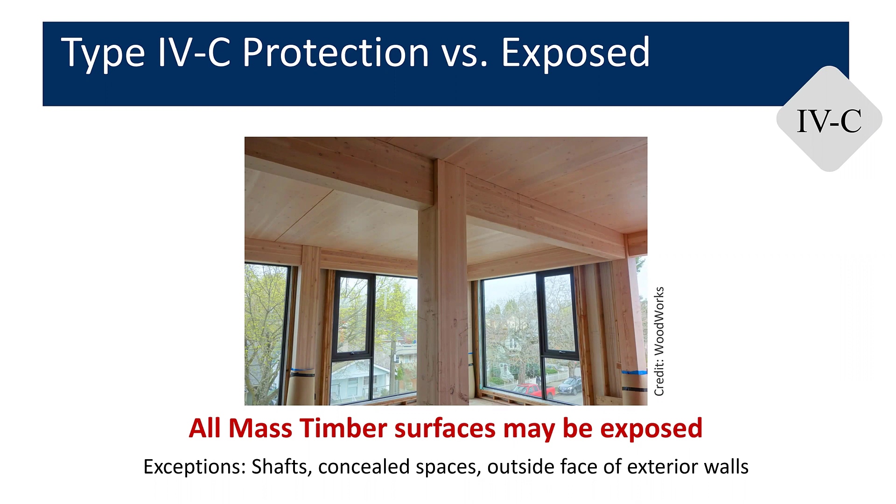For Type 4C construction, similar to Type 4 heavy timber, all mass timber surfaces are permitted to be exposed. However, there are some limitations that differ from Type 4 heavy timber, including required protection for shafts, concealed spaces, and the outside face of exterior walls.

Unlike Types 4A and 4B, non-combustible protection is not required for the floor surface and roof surfaces in Type 4C construction. However, the minimum 1 layer of 5/8 inch Type X gypsum wallboard is required for the outside surface of exterior walls, while no protection is required for the inside surface. This takes into consideration the building heights, which are the same as permitted for Type 4 heavy timber construction and are within the reach of fire department aerial apparatus.

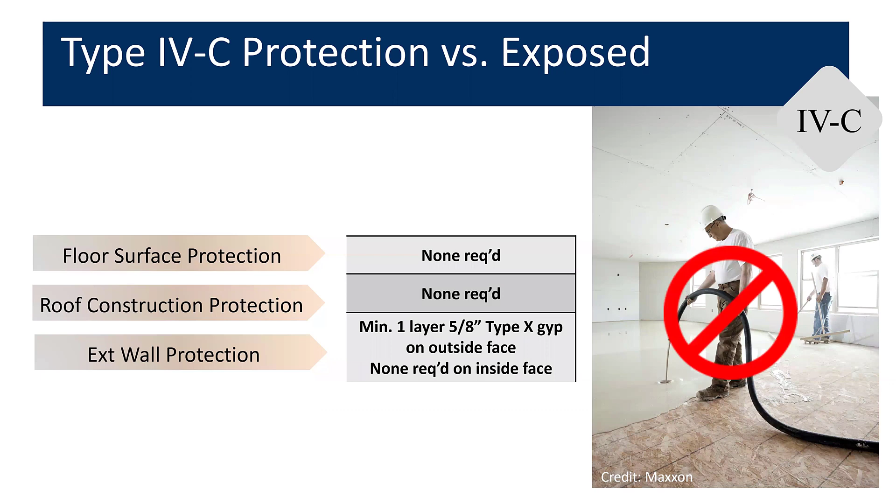This graphic, which was prepared by Susan Jones of Atelier Jones, shows the advantages of increasing protection for mass timber surfaces and fire resistance in terms of height and area for a hypothetical business occupancy building.

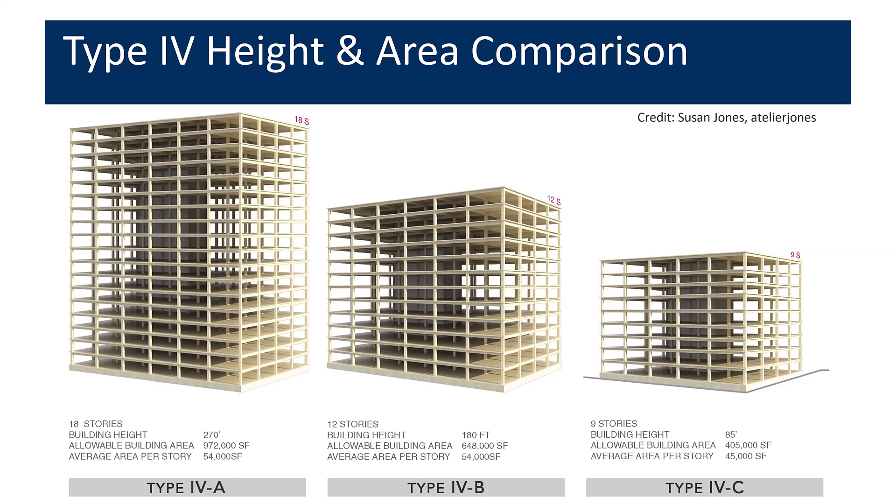Full advantage of the architectural aesthetic provided by exposed mass timber surfaces can be realized through the use of Type 4C construction, but the building heights and areas will be most limited. Where the focus is on carbon sequestration, full protection of mass timber surfaces will allow for a substantially taller and larger building by using Type 4A construction. Where the project goals include a combination of aesthetic and carbon sequestration, Type 4B construction provides an intermediate solution, although the amount of exposed mass timber surfaces is limited and requires careful coordination to ensure adequate horizontal separation.

In addition to the major changes related to construction classification, fire resistance, height and area, the 2021 IBC will include modifications to address other aspects of tall wood buildings.

During construction, special inspections will be required to ensure proper construction of the mass timber elements. This will include verification that the proper adhesives have been used.

Taking lessons from lightweight wood construction, the 2021 International Fire Code will include provisions for minimum water supply at the site during construction and maximum number of stories allowed to be built before the required non-combustible protection is installed.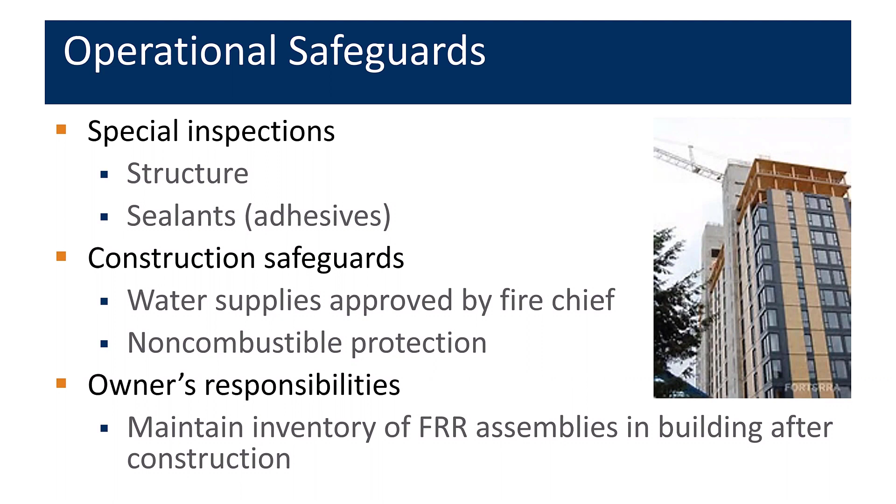Once the building is occupied, another provision will require that the building owner maintain an inventory of fire resistance rated mass timber assemblies and ensure that they are properly maintained over the life of the building. This, of course, will present its own challenges, particularly in residential buildings.

As Carl mentioned, during the fire test, where fire compartments were constructed of CLT and allowed to free burn to self-extinguishment without automatic sprinklers and without manual intervention, delamination of CLT layers was identified as an issue. Falling to the floor, these delaminated sections would rekindle and allow subsequent delaminations. It was clear that the adhesives were not performing as desired.

The 2018 edition of PRG 320 added new elevated temperature performance requirements for adhesives used in CLT elements. The 2021 IBC specifically requires compliance with the revised edition of PRG 320 to ensure that suitable adhesives are used for CLT members.

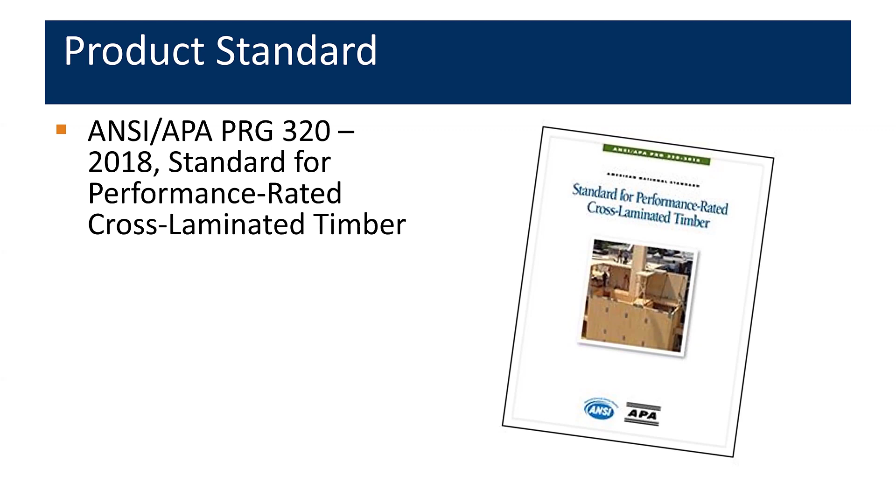Another lesson learned from the NFPA fire test was that there was air movement through the joints of mass timber elements. To address this, sealants are required to be provided that meet the requirements of ASTM C920. Adhesives must meet the requirements of ASTM D3498. The exception to this requirement is where a sealant or adhesive is not a required component of a fire resistance rated assembly.

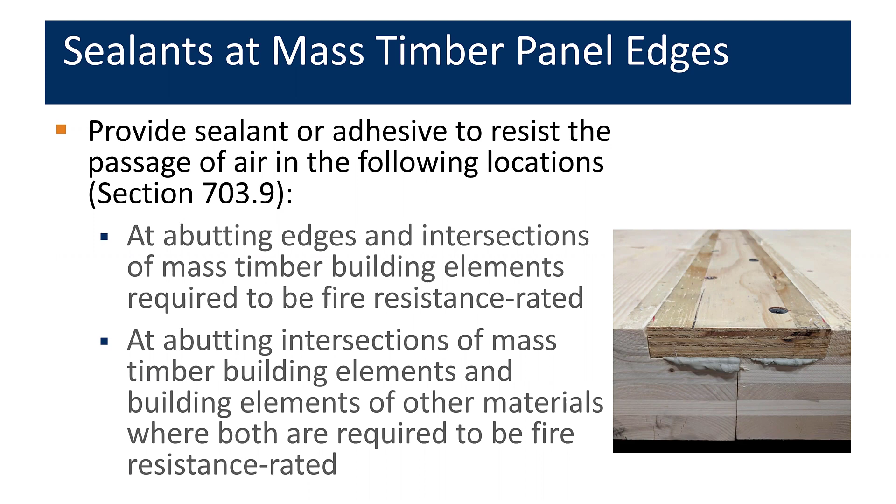Concealed spaces are somewhat of a sacred item preserved from prior editions of the IBC. Part of the successful fire performance of heavy timber buildings is that concealed spaces are not permitted. The heavy timber construction of such buildings is open, providing no place for fire to initiate and grow without being easily seen. Should a fire occur, it is not extraordinarily difficult to extinguish due to lack of concealed spaces.

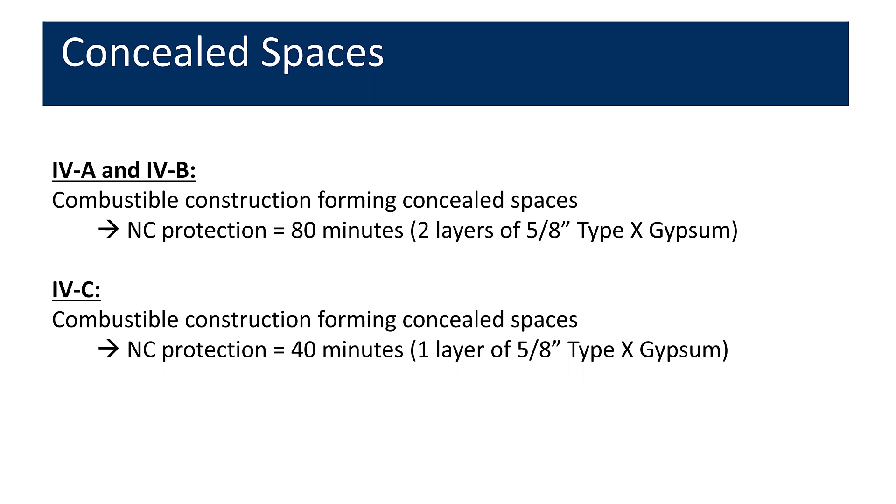Yet, realistically, there will likely be some residential and even business uses in new mass timber construction. These types of occupancies often have significant amounts of mechanical, electrical, and plumbing components. To accommodate this, concealed spaces are permitted in types 4A, 4B, and 4C construction, as long as they contain only MEP systems and are provided with non-combustible protection of at least 40 minutes fire resistance in type 4C and 80 minutes in types 4A and 4B construction.

In terms of shaft enclosures, stair and hoistway shafts up to 12 stories or 180 feet in height can be constructed of mass timber that is protected with non-combustible materials to achieve the appropriate rating based on the shaft height. Non-combustible shafts are required for mass timber buildings over 12 stories or 180 feet in height.

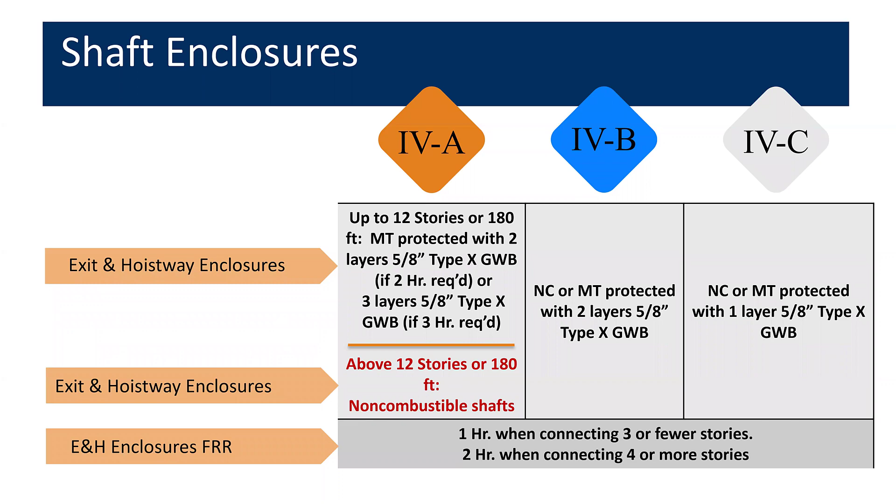Sprinkler system reliability was considered important in tall type 4 buildings. Therefore, the new code provisions include a requirement for 2 water supply mains serving the sprinkler systems in buildings over 120 feet in height. As a comparison, 2 sources are required in type 1 construction that is more than 420 feet in height.

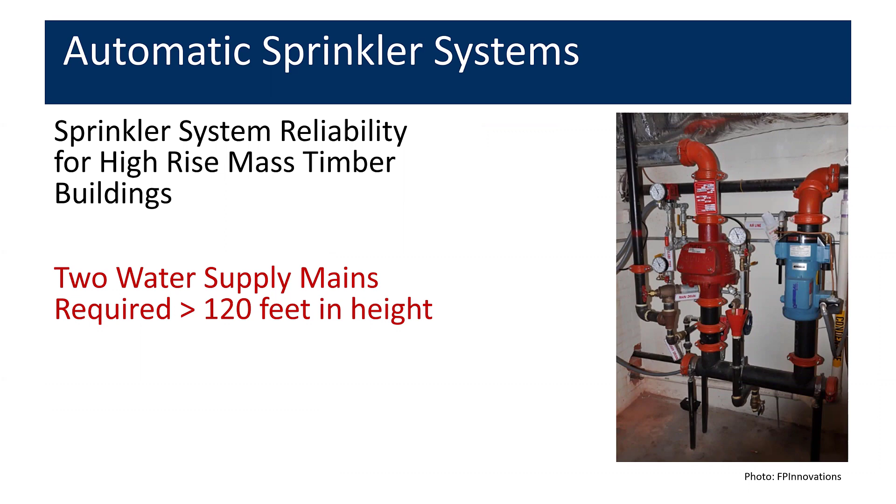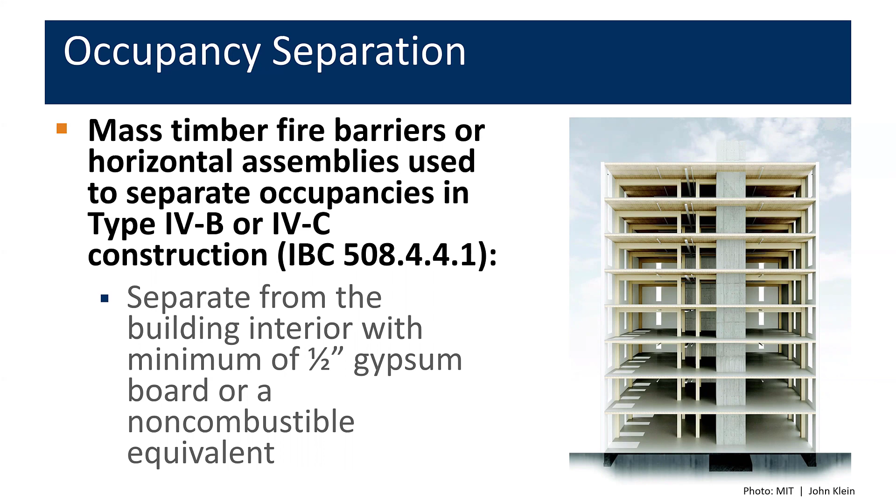Again, a bit more conservatism was employed for occupancy separations with this provision. It requires that mass timber elements serving as fire barriers or horizontal assemblies used to separate occupancies in types 4B and 4C construction be separated from the interior of the building with at least 1/2 inch of gypsum wallboard or equivalent non-combustible material.

Finally, as designs using mass timber are developed, the details of how to penetrate fire resistance rated floors and walls must be resolved. At this time, there are a limited number of listed fire stop assemblies for items penetrating CLT panels. Woodworks has published a list that you can view on their website. Note that these listings are for CLT and not NLT, DLT, or other methods of creating mass timber panels. The listings are very specific and generally limited to single penetrating items or single cable bundles. You can seek engineering judgments for other conditions to the extent that fire tests and similar listings support them.

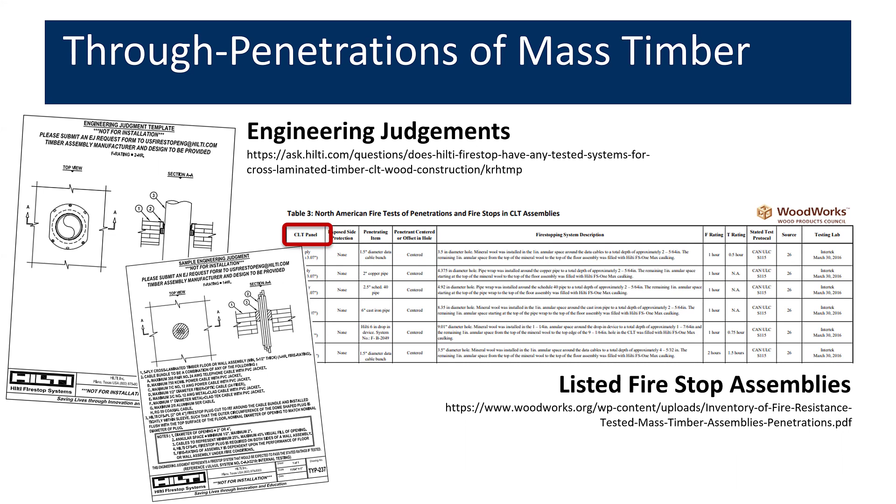Now I'll pass it back to Carl for an overview of a case study. Thanks, Tim. In this particular project in Cleveland, Ohio,

we were given an interesting challenge by the client who wanted to develop an 11-story office and an 8-story residential building on a site that's in a trendy area of the city. Of course, at this time, there's no currently adopted code that would allow this type of construction. So we had various discussions with the local authorities to bring them up to speed on the 2021 edition of the IBC, and they were open to that concept.

One other issue is that the architect wanted to expose up to 50% of the mass timber buildings, but the building was taller than what would be allowed for type 4B construction. So we analyzed relevant fire tests that were directly comparable to that design, and we also identified some enhancements that provided the local authorities an additional degree of confidence that the risk was acceptable. That project approval took about 3 months, and so we consider this to be a very successful case study for the client and for the city.

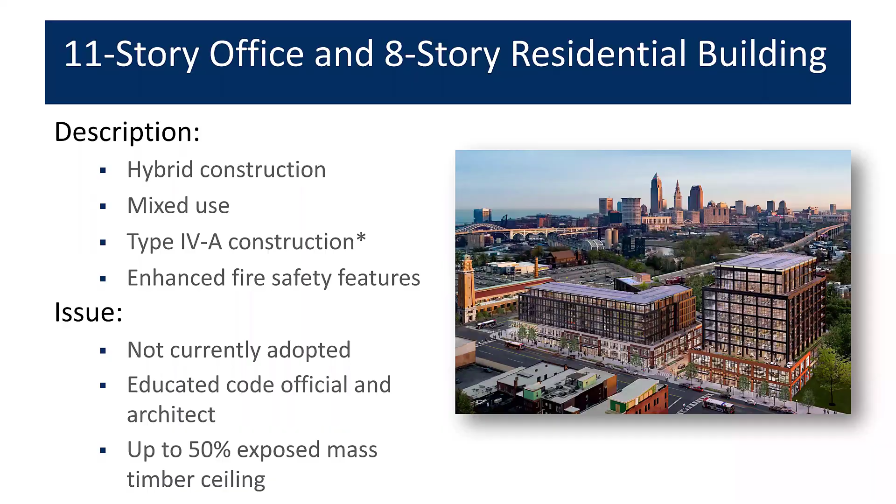So in summary, we hope you've had a nice introduction to what's going to be in the 2021 edition and why the code provisions were developed. And at this point, we're able to take your questions. Thank you very much. All right, thank you, Carl.